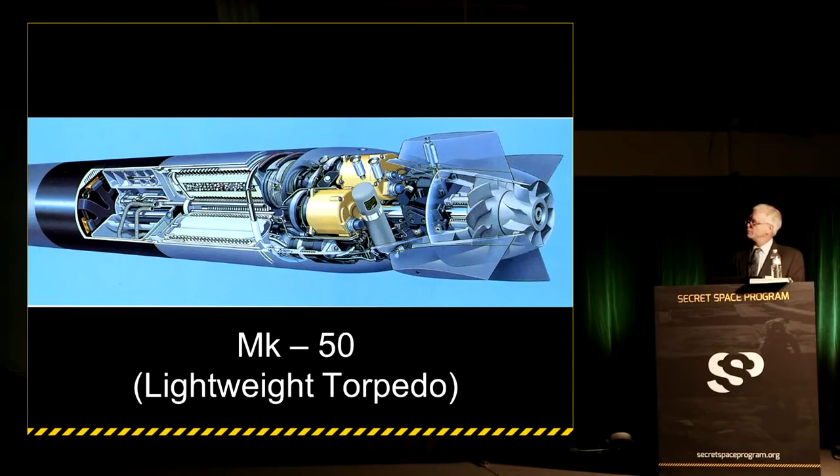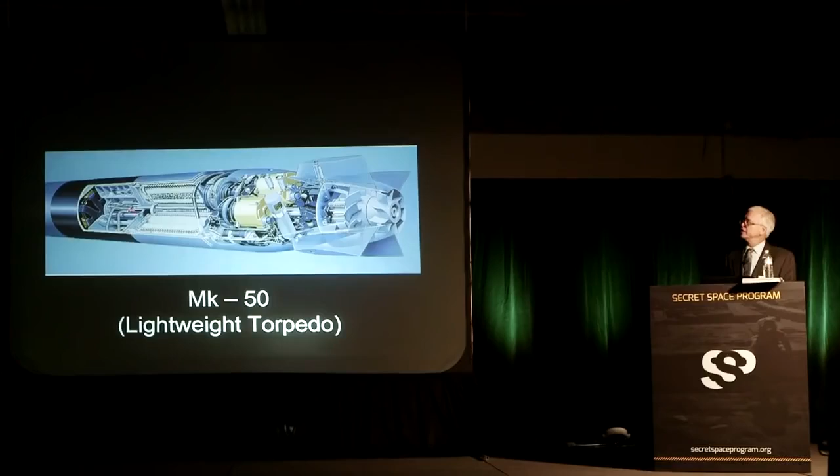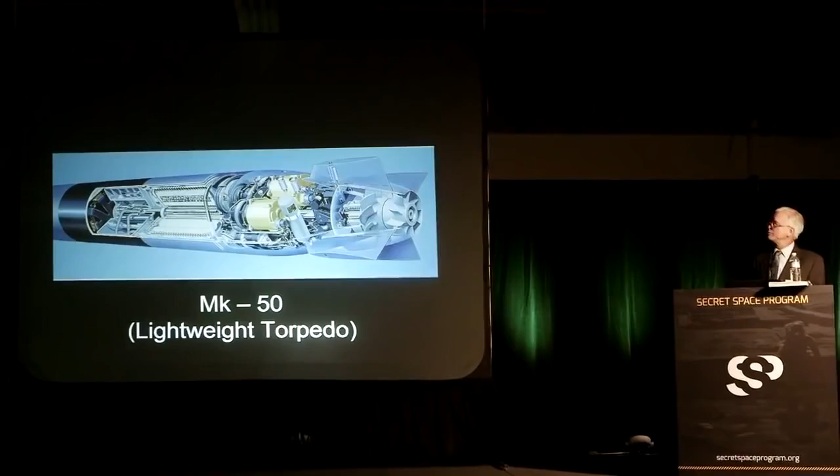This is a cutaway illustration of a propulsion system for a lightweight torpedo that basically involves a lithium core that is ignited once it drops into the water. This heats up an oxidizer, flows through here, creates high temperature steam through these heat exchanging tubes, goes through a transmission, drives a generator, and also a couple of counter-rotating props in the back.

Being able to figure all that stuff out, and I take a lot of pride in the accuracy of my work, involved a certain amount of engineering. Even though I'm not an engineer and don't have an engineering degree, I spent an awful lot of time studying how things are put together, how they work, and what the physics and engineering are behind these systems.

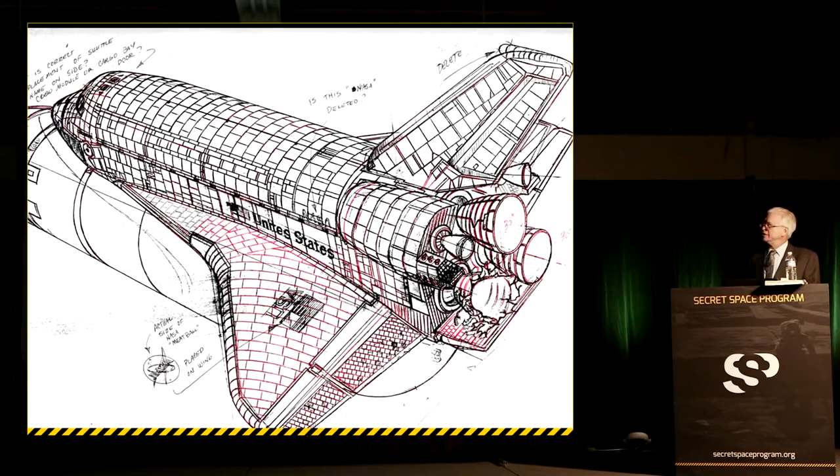Whether it's mapping out every single tile on the space shuttle or doing the cover of a magazine on the TR-3 - this particular magazine plays a significant role in the story I'm about to tell you - or mapping out the plumbing for an advanced rocket system, or the cover of another magazine.

Eventually, while working in the industry, I had the opportunity to make contact with a lot of people in the military, some of whom expressed an interest in having some of my artwork in their squadron ready rooms. So I was actually able to arrange to get what are called media orientation rides, going up in these planes to see how the pilots handle the stress of flying.

This particular aircraft, the F-16, is capable of over 9 Gs in a turn. So this brings to mind the question: why would you want an aircraft with that kind of capability?

I asked myself years and years ago, millennia ago, if man had never taken the time to study flying insects or birds or bats or any kind of flying animal on this planet, would they ever have had the inspiration to think of flying, to come up with the idea? I wonder whether we ever would have gotten off the ground if we hadn't had those other naturally occurring creatures to give us inspiration.

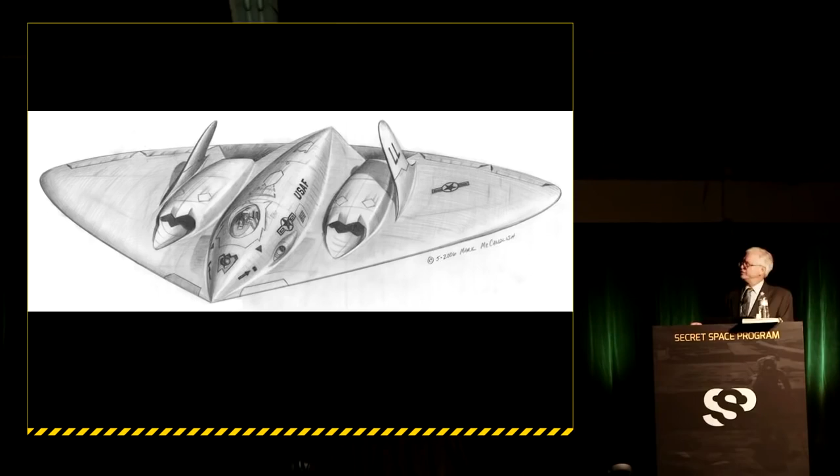There are ways that you can modify the inlets for the engines so that when a radar beam from a distance is looking at the sky where the aircraft is, it's harder for that radar to get into the inlet where those metal turbine blades are turning and reflect a lot of energy back and let people watching know that you're there. And so applying these different techniques, looking for ways that you can make an aircraft perform better and do it very quietly, very stealthily, even in the materials that are used.

I'm sorry, I pushed the wrong button here.

There have been a number of questions about what the name of this vehicle was, but for me, the discovery of its reality was kind of what led me down the road to being aware, or suspicious anyway, that there was a kind of secret space program.

And so the way this happened, I was approached by Lockheed Martin. I think at the time they were still referred to as only Lockheed. And the particular division that approached me was working on behalf of the Skunk Works division. And they said that we have a new aircraft that we want to build, and we need to get the appropriate funds from the government.

So we need you to create an illustration for us that shows an aircraft that's really fast, something that looks dynamic, very, very fast. And at the time, I was reading some of the trade journals like Aviation Week and Space Technology, and I knew that one of the up-and-coming technologies they were talking about was something called scramjet technology, which is shorthand for supersonic combustion ramjet.

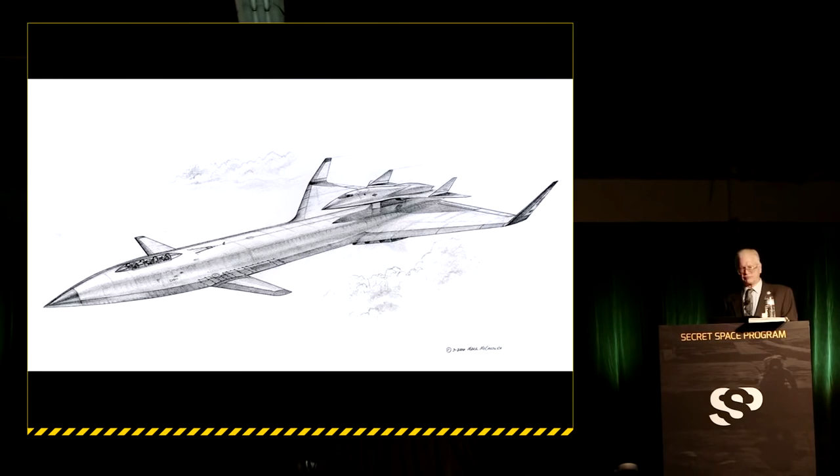It turns out that shortly after I submitted a sketch of this particular aircraft, they decided to completely scrap that. And so I wound up doing an illustration of an aircraft something like this.

There was one proposal where it might actually be possible to deploy this particular aircraft right out of the back end of a flying C-5A Galaxy. This is sort of my conceptualizing of how many you could actually fit into a C-5, knowing what the size of this aircraft was.

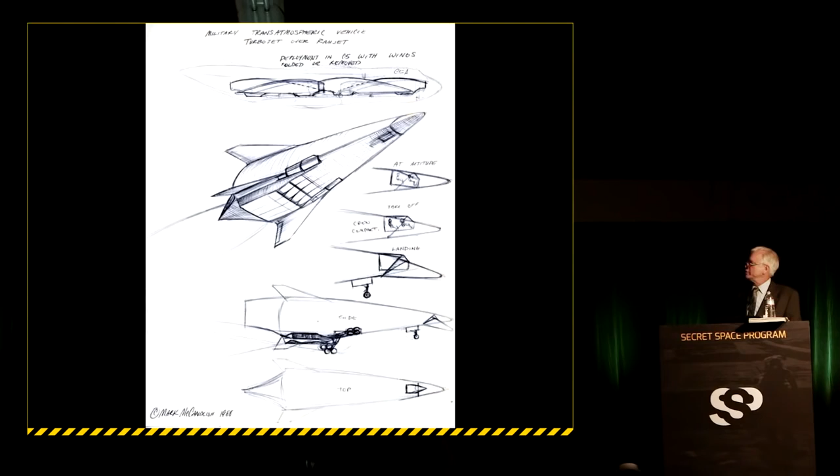It had a scramjet nacelle on the ventral surface, and it also had one on top. This particular version only had one underneath. And because of the shape of the aircraft, it made it very peculiar, or awkward, where the landing gear would come out in order for this thing to work properly.

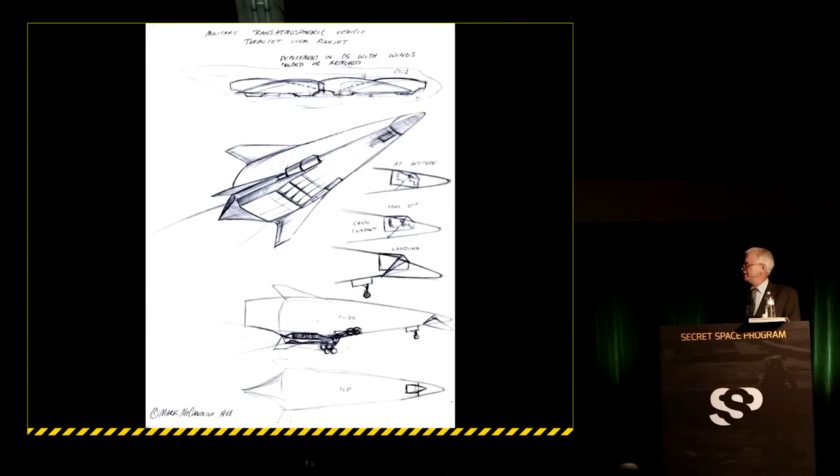Now, about the same time, there was a lot of talk about a crash, an aircraft vehicle crash that had occurred somewhere near Barstow, California. There were some people describing different features of the aircraft. There was a fellow that I met and talked with who was friends with a number of the astronauts, and they were describing how there was a particular astronaut flying a Learjet, ferrying it from one location to another through the state of Nevada.

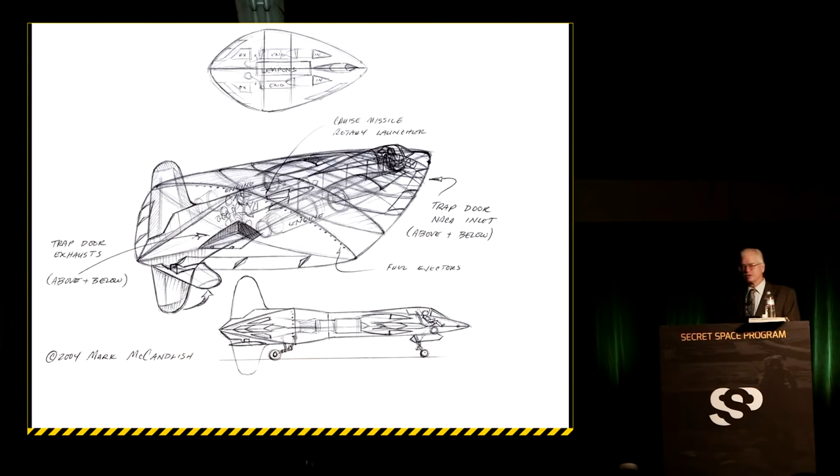He came out of the clouds and found himself sitting slightly above and behind an aircraft that looked just like this. Now, the interesting thing about this aircraft is that it had some very strange features. It had engines buried inside the fuselage with sort of a NACA duct-shaped inlet there. There was kind of a slot in the back. It looked like there was maybe a trap door, control surfaces along the bottom, exhaust diffusion.

But it also had this very interesting feature, and most people don't know this, that the predecessor of the SR-71 Blackbird, the YF-12A, which was kind of a strategic aircraft used for missile delivery, also had a folding ventral vertical stabilizer, or tail. And so this aircraft obviously had that same particular feature.

The vehicle was all black, or sort of a deep gray. As the pilot was flying along, looking at this thing through the clouds, he suddenly realized that if he had not seen this directly, he might have collided with it as they were flying through the clouds together. So he gets on the radio to his ground control people.

He says, I've got some traffic up here, why didn't you warn me? And they said, well, there isn't any traffic up there. And he says, well, of course there is, I'm looking right at it. It's black, shaped like a flattened out football, no wings to speak of, two tails, one above, one below. There was a slight pause in the transmission back and forth, and suddenly the pilot turns around, looks out the window, and registers an expression of surprise and anger, banks into the clouds and disappears.

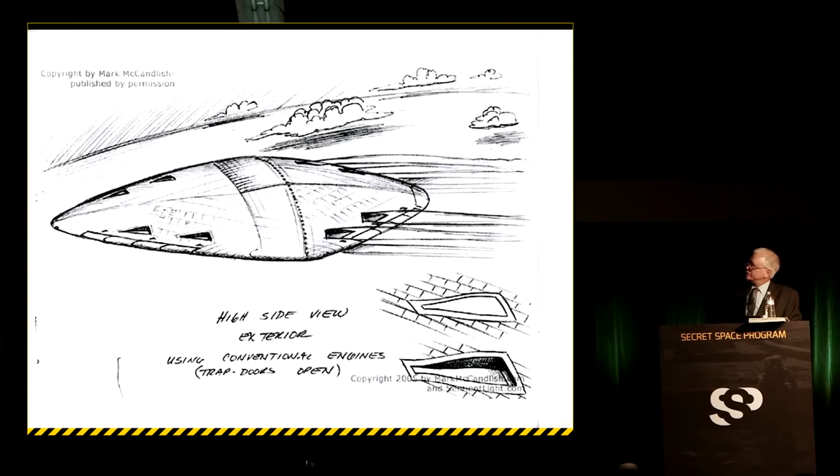This aircraft was being described within the industry as a vehicle that would produce an exhaust trail, the so-called 'donuts on a rope' exhaust trail. It seemed to imply there were two different propulsion systems in use in the aircraft to get it up to speed. Nobody really understood what they were or what actually made the aircraft function the way it did.

As it happened, I was asked to do this painting for Popular Science on the so-called Mach 5 spy plane, and it went into details about all the seismic events in Southern California that raised the curiosity of some people watching what was going on.

I remember at the time, this was in the late 1980s, early 1990s, that you could go out into the high desert of Southern California at night and see these things flying overhead, back and forth. When the sun was just below the horizon, it was dark out, but there was something still up there. You could see it moving, and moving very quickly.

About the time I did that illustration for the magazine, I was contacted by a colleague, a friend I went to college with, and I invited him to go to an air show at Norton Air Force Base in San Bernardino, California, about 75 miles east of Los Angeles. The Thunderbirds were going to fly, and it was a bit of an overcast day, but in the end I wasn't able to attend, mostly because I had a job to complete another illustration for a client over the weekend.

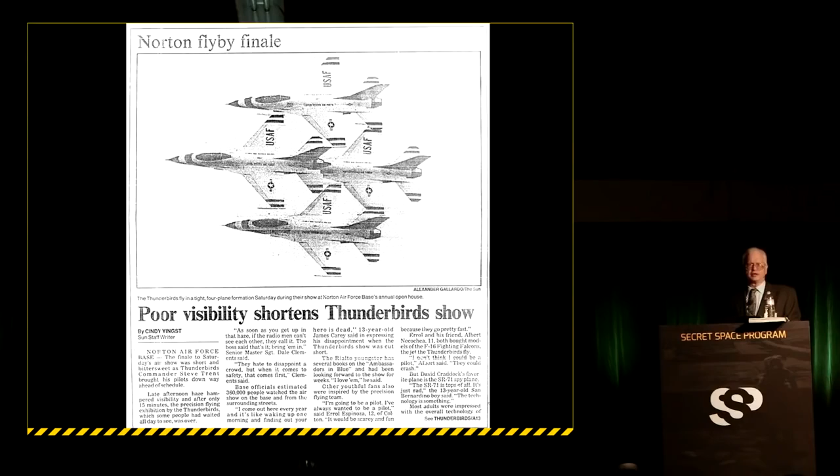It turns out, over the next few years, I began to get the details of what had happened. Right about the time the Thunderbirds flying demonstration team was beginning their exhibit, the gentleman my friend was with said, 'Let's go over here.' So they went into a hangar, and there was a group of other people there, including some well-known congressmen. Senator Alan Cranston was allegedly there, and Congressman George E. Brown, chairman of the Congressional Committee on Space Science and Advanced Technology, was there, along with a lot of high-ranking military brass. They all boarded a military passenger jet, a 727, and were flown up to Palmdale, to Air Force Plant 42, where you find Lockheed Skunk Works located.

As they were going into the hangar, the gentleman turned to my friend and said he just realized there are some aircraft on exhibit here that you're not cleared for, security-wise. You are not cleared to see these aircraft. So just enjoy the show, walk around, listen, take a look, but don't say anything to anybody.

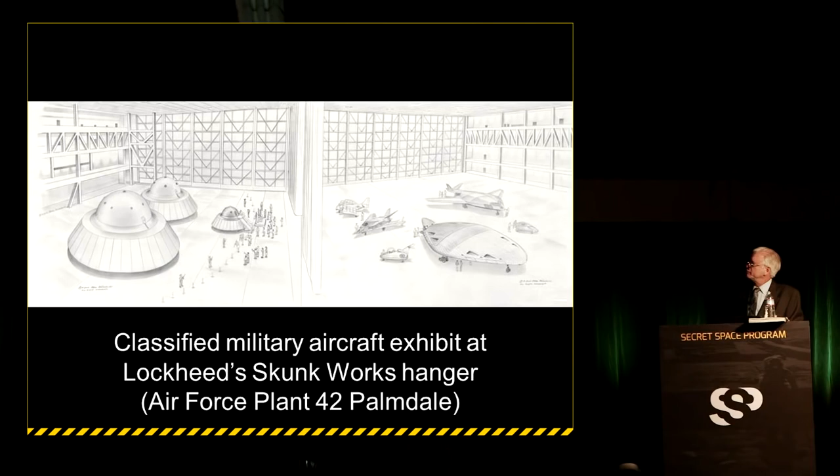This particular vehicle here, a rough close-up, was a sort of an answer to or a follow-up to the A-10 Warthog, which was an anti-armor aircraft. It's a vehicle that carries a very big Gatling gun, fires thousands of rounds per minute, and is very durable, very hard to take out of the sky. It's heavily armored, with a big gun that sits inside of it.

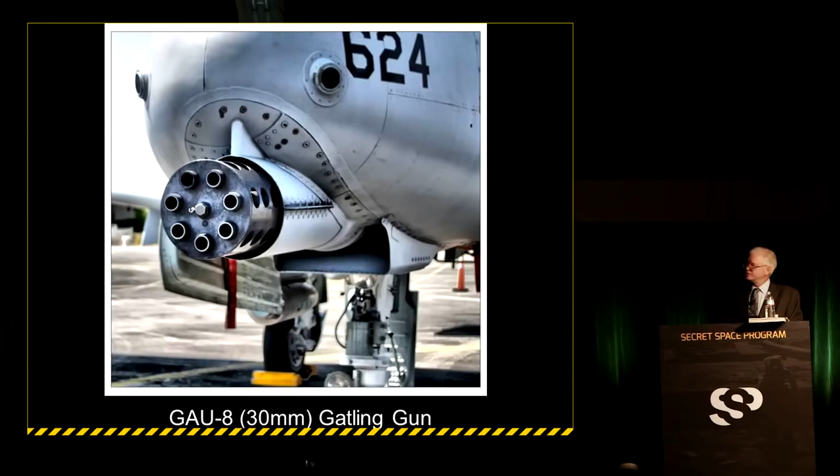This aircraft was designed with a very unusual kind of wing. In aerodynamics, they have something called the Coanda effect, which involves blowing air across the surface of a wing to provide lift, rather than just relying on the movement of the wing through the air to provide that same lift.

The design of this aircraft involved mounting the engines above and slightly ahead of the wing, using high-temperature alloy shaped like a flattened funnel that blows right over the wing. When the wings are all rotated in sequence, it forms a smooth ramp that the air can flow down, going from horizontal, following the surface of the wing with this Coanda effect, a kind of aerodynamic adhesion. This redirects the thrust of the engine to point almost straight down, right about where the center of gravity is for the aircraft.

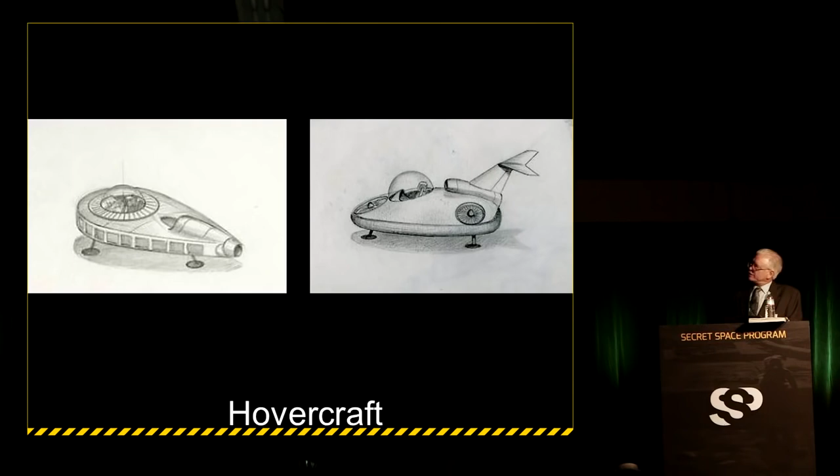The hovercraft were kind of unusual. There was one that had a jet engine in the tail, a teardrop shape, with a series of little trapdoors around the perimeter that would open and close as it was flying along. This jet engine also had a transmission connected to a set of counter-rotating turbine blades that surrounded what amounted to a bubble-type cockpit, almost like something George Jetson would be flying in one of his cartoons.

This one over here, I've actually seen a version very similar to this in one of the popular science magazines, where it had a turbine in the front and two in the back, one on either side, driven by this particular engine through a transmission of sorts. It had the same sort of sphere-shaped cockpit too.

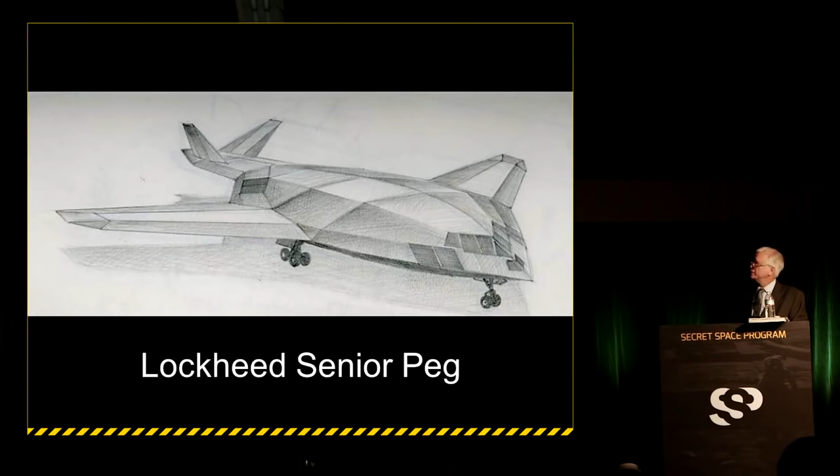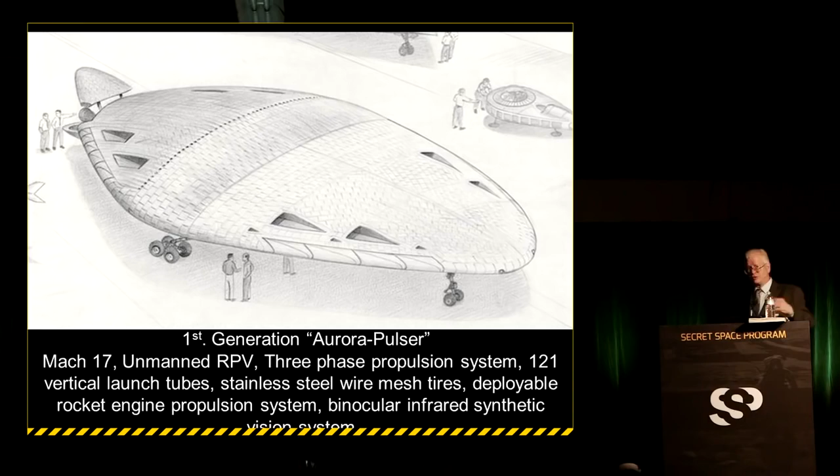Just like the aircraft I showed you earlier that had the tail above and below the fuselage, this aircraft had NACA duct-style inlets for 4 engines and 4 exhausts, both on the top and on the ventral surface, or the belly of the aircraft.

After I discussed this particular weapon system on Coast to Coast with one of the hosts working that particular program, I received some email from a number of sources indicating there were inlets and exhaust ports both on the top surface and on the ventral surface. At the time of the exhibit, my friend said he could only see the underside of the aircraft. He couldn't see the top because it sat up kind of high off the ground, so he didn't know whether there were 8 exhaust ports or only 4.

It turned out that one of the people I corresponded with after doing the radio program said they had been jogging late at night when an aircraft like this was leaving one of the United States Air Force bases in Great Britain. He said what was unusual is that when it took off and lit up the afterburners, which dumps a lot of extra fuel into the exhaust stream, you see this sort of bluish glow coming out of the exhaust. He said there were 8 ports, which helps point out that you have 4 above and 4 below. So we knew that was true.

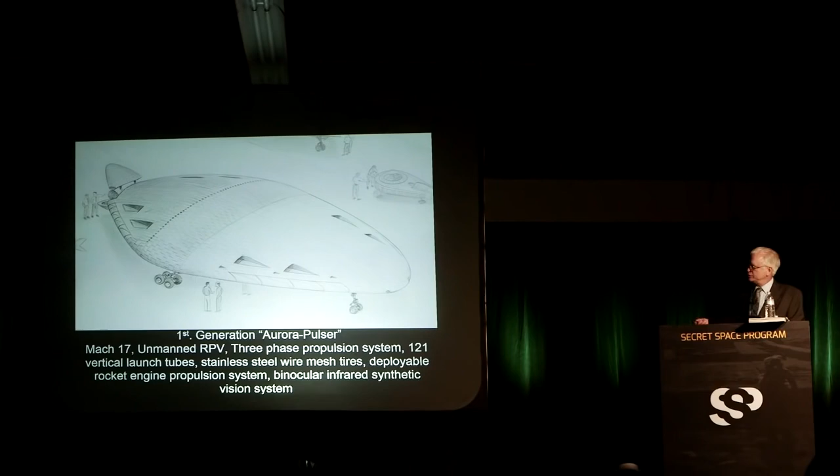Now, one of the things you don't see in this particular illustration, but is a little more evident in this illustration I did for Aviation Week - the perspective on the underside is a little off, these should be flattened out more - is that there's 121 vertical launch tubes in the belly of this vehicle. Each one is capable of carrying something like a cone-shaped reentry vehicle, like a MIRV, which also suggests deployment from outer space.

The way the system would work was remarkably simple. It had a kind of tile with explosive bolts holding it in place on the outer skin, and sitting behind it, the weapon would be held in place. It's not shown in this illustration, but I've subsequently learned there was a kind of three-piece fiberglass sabot which would hold the weapon straight in the bore, so it would always be pointing a certain direction.

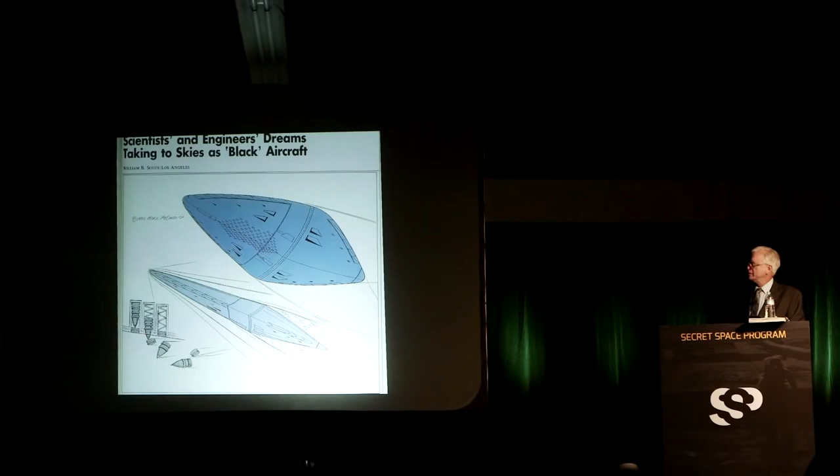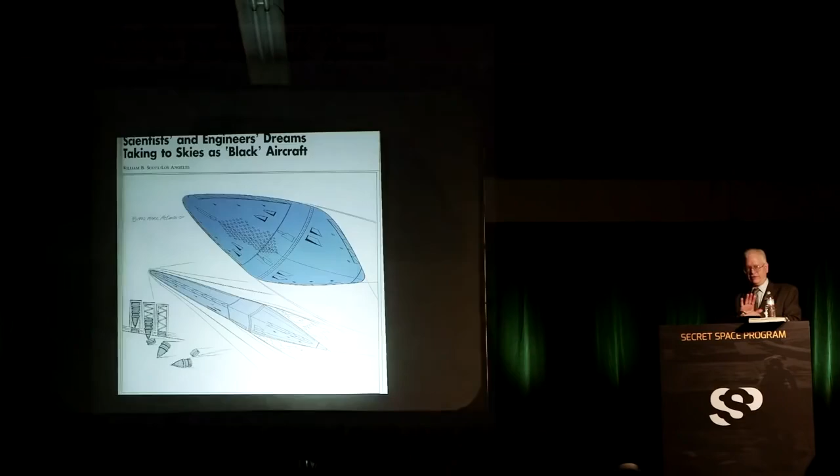The ingenious and simple aspect of this thing was that when the explosive bolts on the outside were ignited, the tile would disintegrate and blow away. And when it did, there was a big coiled spring about 12 inches in diameter behind the vehicle that would push it out of the hole. Right behind the reentry vehicle was another tile that would slam down into place and cover up that hole again, almost in a tenth of a second.

The reentry vehicle - oh geez, sorry, let's see, where are we - right there, would then stabilize, because of its center of gravity weights and the shape of it, would stabilize in the airstream, go into the atmosphere, and be able to acquire its target and do its job.

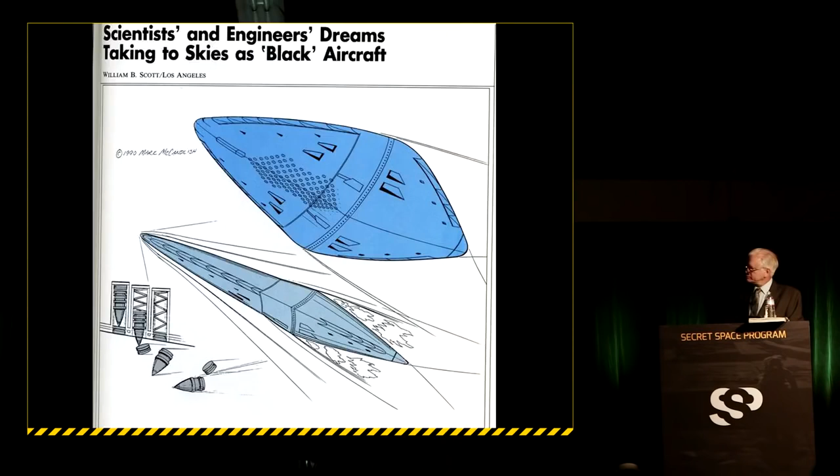One of the things this particular aircraft would do, if you look at the ridge here where these fuel ejectors were located, is expel fuel that would be ignited by just the intense pressure and heat of the air flowing across the front of the aircraft.

One of the things the artist did not capture in this particular view was the fact that the front end of this thing is going through the air so fast that it's glowing red hot, just because of the velocity and friction going through the air at such a high speed.

As that air is further compressed as it comes up on this ridge, it meets with the fuel. As the fuel is sprayed into the airstream, it spontaneously combusts. But by this time, the aircraft is already going well above Mach 1, so there's a supersonic shock wave that forms and basically separates...

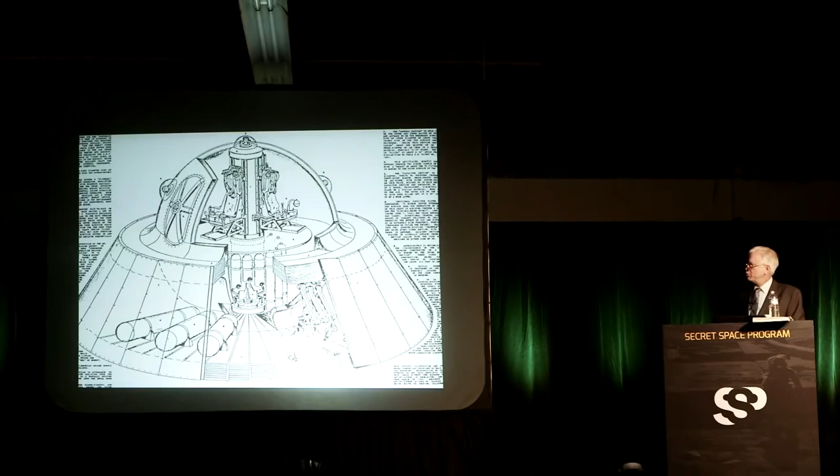If you think about it, there's a process used throughout the industry, and even in dentistry, called centrifugal casting. What you do is create the mold and whatever components you want to go in it. There's a sprue in the middle, and you take the molten material you want to go into the mold and pour it through a funnel-shaped opening. If the mold is spinning, the molten material flows out to the outer edges and pushes away all the little air bubbles that might get trapped, and they migrate back to the center where they can be drawn out.

So you wind up with a single casting, if you will, with all of these components in it that will not have any air bubbles, inclusions, or impurities—anything that would cause the system to short out when you're using millions and millions of volts of electricity.

But even so, when I computed the total weight of all that metal and quartz, at 24 feet in diameter and 12 to 14 inches thick, it worked out to something like 24,000 pounds. So you have to ask yourself, how can something that weighs 24,000 pounds get off the ground—especially since nobody believes something using the Biefeld-Brown effect could actually levitate something that heavy?

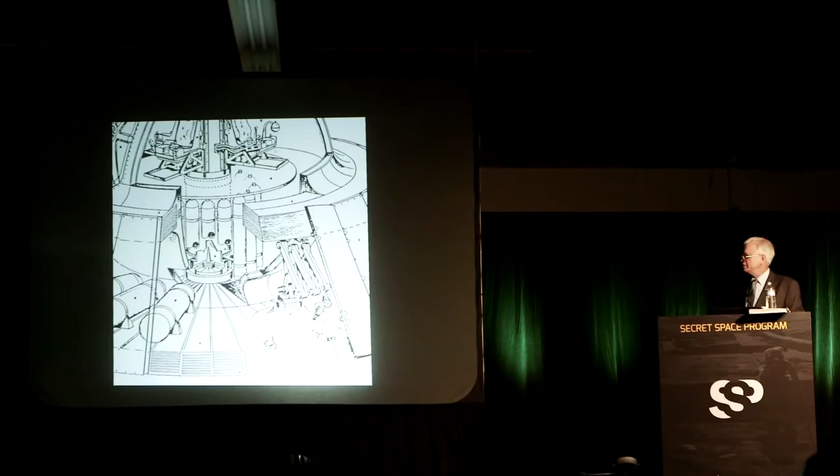The plates in each stack were staggered so that the gaps on one lined up with the plates on the other. There's significance there, because if you map this out on paper, you see that if you had something like a 1/16 of an inch thick, you could slide it into the gap. If you shined a laser beam, like this thing I'm carrying in my hand, through this material, it would be able to filter through all the gaps because of the way the plates are aligned.

So I began to look at other phenomena. It also occurred to me that what's really strange about the coils is that normally, if you're talking about an electrical circuit using millions of volts, you want wire with many strands twisted together so it can conduct more current.

If you know anything about physics, electrons are all negatively charged, and you can't really bring them together, except in superconductors, because like charges repel. So when you have a conductor and electrons are jumping from one atom to the next as the electrical pulse flows through, the electrons repel one another and migrate out to the surface of the conductor.

So in this instance, you have coils of single filament copper wire, or at least what appears to be single filament copper wire, running through this quartz-like material without multiple strands to conduct more electricity. It just seems like a contradiction.

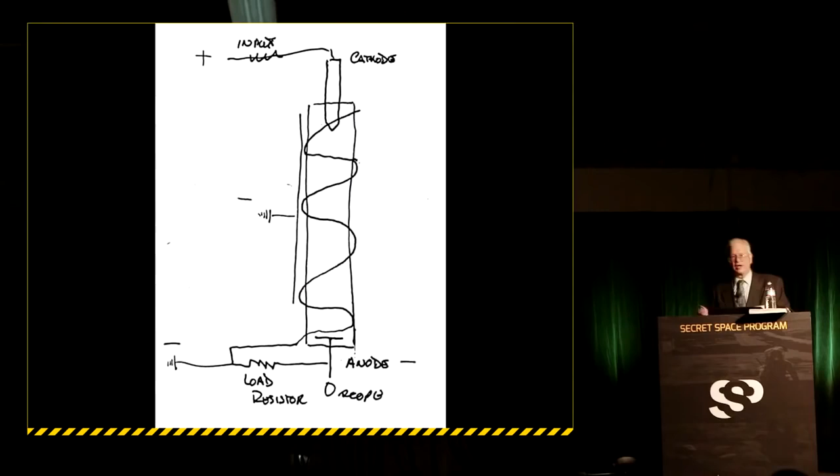This was patented by a gentleman named Kenneth Shoulders. He was a fellow who worked with another friend of mine, Hal Puthoff, for a number of years. And he had done a lot of research into something called zero-point energy.

Zero-point energy is a technical term in the physics literature - quantum zero-point fluctuations of the vacuum. Now, the discovery of zero-point energy was made probably back around the end of the 1800s, early 1900s. They were beginning to experiment with cryogenic fluids, taking a gas like nitrogen or oxygen and compressing it down to the point where it actually became a liquid, became super cold, hundreds of degrees below zero. And the research they were doing was trying to find out what the actual temperature was of absolute zero. And by absolute zero, I mean that there's no warmth left in the material - no Brownian motion, no movement where the individual atoms or molecules are vibrating, bouncing around.

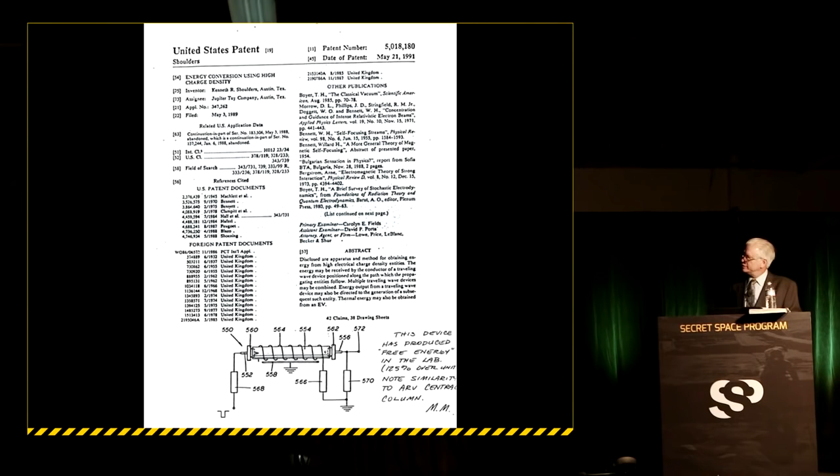So I started looking at what zero-point energy is, where it comes from, how it can be manipulated. And I looked at some of the papers that were written by scientists like Bernard Haisch, Alfonso Rueda, Hal Puthoff, Daniel Cole. In the early 1990s, they wrote a number of papers that actually described this, and you can see the similarity between the two things - you can see that there's clearly a design similarity. And yet, I looked for other possibilities as well.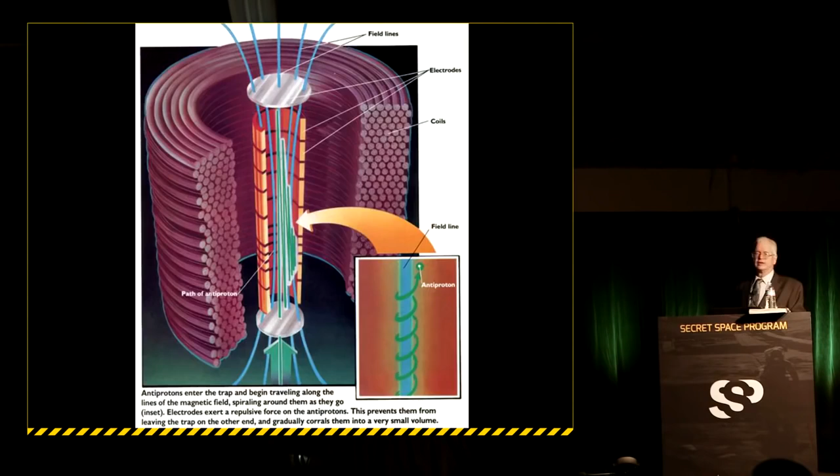The possibility that we had something like an antiproton trap going on here, where there might be some aspect - you have the same kind of coils going around the outside, a central column, a way of trapping antimatter. I thought that this might be something like the so-called antimatter drive that was used in some of the Star Trek vehicles. So I began conceptualizing, began looking at different ways that you could actually make this system work.

Now, somewhere along - I think it was somewhere in the late 1990s, early 2000s - I came across a number of books that described: Joseph P. Farrell, who's another one of the speakers here, had found some historical records after the Second World War that described a device that was being worked on by the Nazis in the Wenceslaus mine up in southern Poland, called the Nazi Bell Project, or Die Glocke.

Now, that particular system, based on the documents that were found, was made up of a pair of counter-rotating cylinders, one inside the other, with a coil that went around the outside. And electricity was being fired through the system. So I started looking at ways that you can make that work.

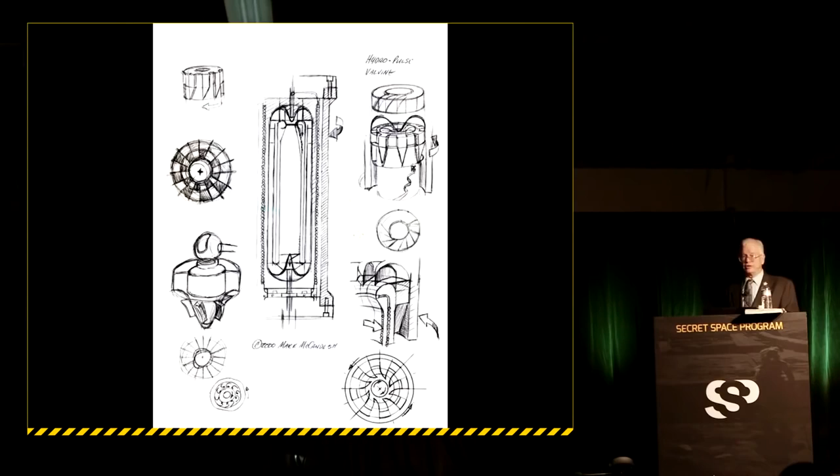Now, the first thing I thought of was that if you put a lot of electricity in this thing and you have big coils around it, you actually may wind up in a situation where you can't get an electrical motor to actually drive the system, unless you had a pulley system that was sitting way off to the side, away from the electromagnetic fields that would sort of interfere with its operation.

But I found out that, of course, Mercury has some interesting characteristics - I think there's something referred to as the nuclear spin ratio. The particles in the nucleus of the atom of Mercury and the electron shells have a spin ratio of something like 60 to 2. And bismuth, by the way, also has the same kind of property. So I thought it was interesting that these two materials had these unusual characteristics that might make them very important in the operation of this kind of thing.

What I found was that it goes all the way back to Michael Faraday, and the first electrical motor was really just a puddle of mercury with a permanent magnet sitting in the middle of it in a petri dish. He had a little scaffold off to one side with a copper conductor, and he put one wire into the mercury, sent it over to the battery. Another wire would hang down from the top of this scaffold. The minute you connected the circuit, the mercury would begin circulating around inside the petri dish, around this magnetic field.

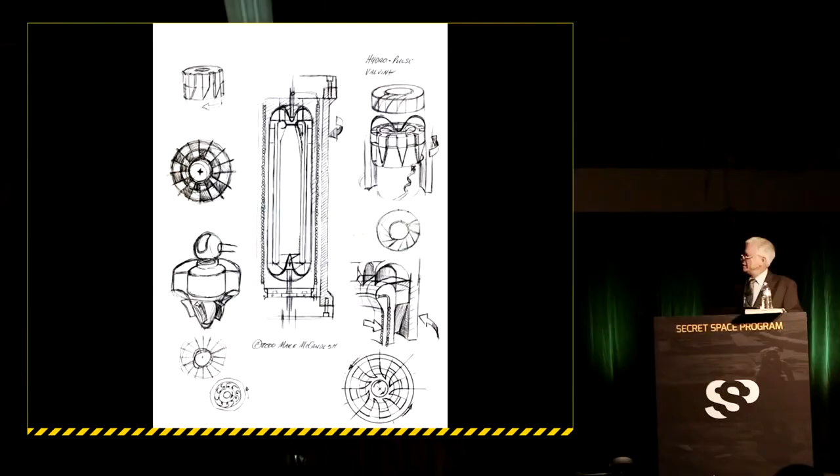If you look at the way the field lines are set up in this particular vehicle, you can see that the field lines basically go out around the outside and stroke down through the middle. That's what they do. By setting the system up this way, you already have the built-in mechanism to make this thing rotate on the inside, just like Michael Faraday's little motor from back in the 1820s, I think it was.

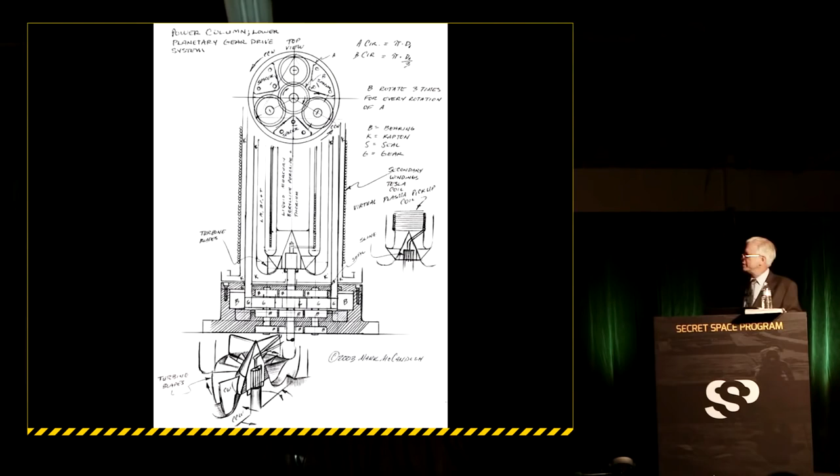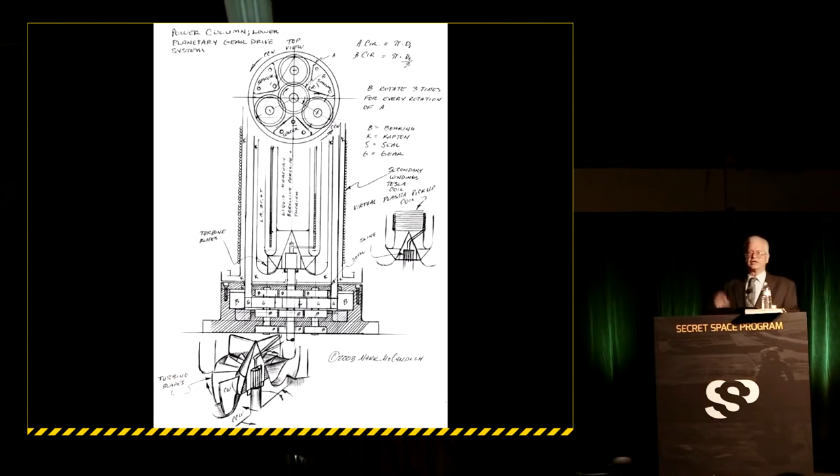The other thing I realized was that you're going to have some way of circulating the mercury. In one of the instances I was looking at ways to mechanically do this and get this counter-rotation going, as described in some papers from the Nazis' experiment, was creating a kind of planetary gear drive system that would sit either at the top or bottom, so that as one of the cylinders is turning one way, the gears would force the other cylinder to turn in the opposite direction. The benefit of this is that when you have things turning in opposite directions or sliding across one another, you get this vorticular motion in the mercury, and it seemed to me that this vorticular motion was something very significant, very important to the operation of the system.

And it's all leading up to the tapping of zero-point energy, which I'm going to get into shortly.

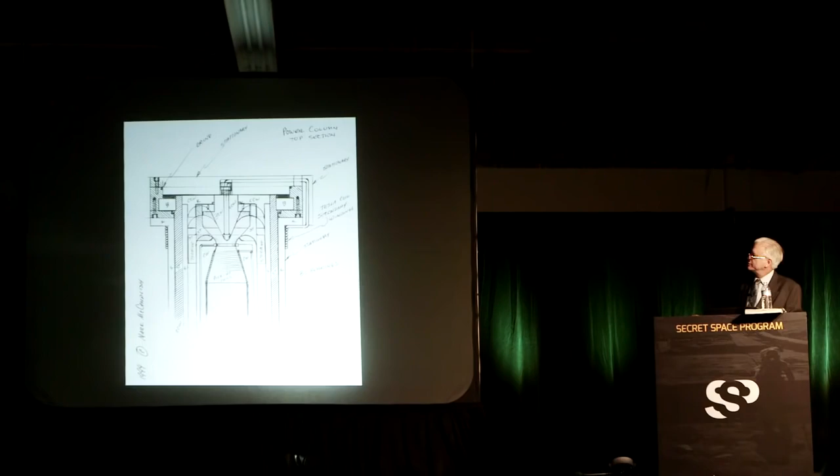The idea was that the mercury would come up in the gap between the two cylinders, reach the top, and be forced down through this venturi, this little funnel-shaped opening at the bottom. You'd have your cathode up here at the top, and a ring embedded in the quartz of the interior cylinder - this is the other cylinder on the inside. You'd have coils inside, so that as the mercury was being charged with electricity, it would cause the mercury to circulate. Because the cylinders are turning in opposite directions, you get this natural tornado-like vortex formation in the movement of the mercury through the system.

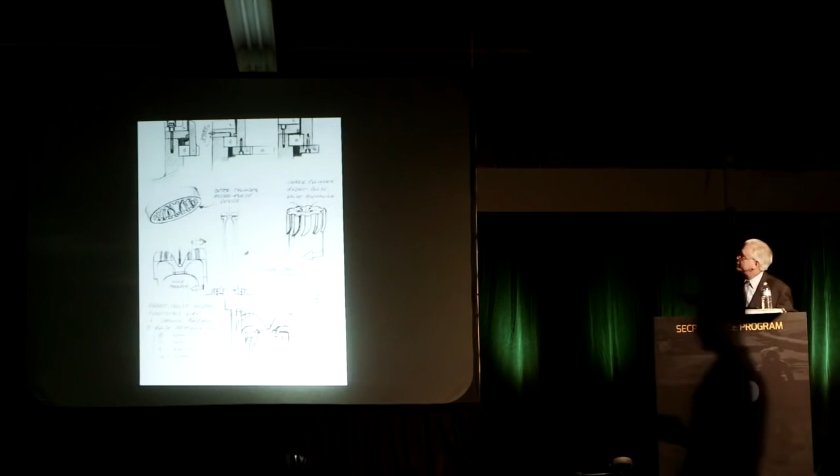The next thing I did isn't as easy to see in this particular diagram. Maybe the next diagram has a little bit better way to see it, down here in the corner. You see the mercury comes up here, and goes down through this opening. Right below that second electrode, shaped like a ring, you get the electricity jumping from there to there as the mercury is being pumped through by the natural flow caused by the electricity going through it.

As a sudden discharge of electricity goes through the mercury, and the mercury is spinning the whole time - spinning like a tornado - you send the electricity through it, and it creates a phenomenon very similar to when a smoker blows a smoke ring. If you've ever studied a smoke ring, you can see it's caused by a sudden discharge of smoke from the lips of the smoker, and the surrounding still air slows down the outer edge of the smoke as it's being expelled, creating a self-stabilizing event where the smoke forms a perfect ring. Even dolphins can do this with the air blown out of their blowhole.

The other thing about that is you find that as this phenomenon is moving downward, probably approaching something near supersonic speeds, down through this central column.

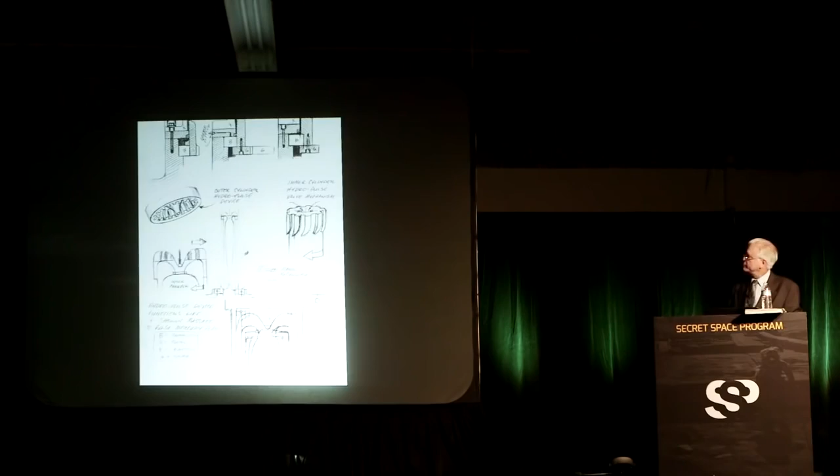There we go, down through the center, right there. Because of the rotation of the device, not only is it creating a kind of smoke ring of ions, highly charged ions blowing down through the center of this device, but you also have a precessing, a rotating around a horizontal axis and a vertical axis, so that you have this twisting motion that goes on.

And so what that actually winds up simulating is ball lightning, which is a naturally occurring phenomenon. It's noted for its ability to be self-sustaining. It creates its own electromagnetic field.

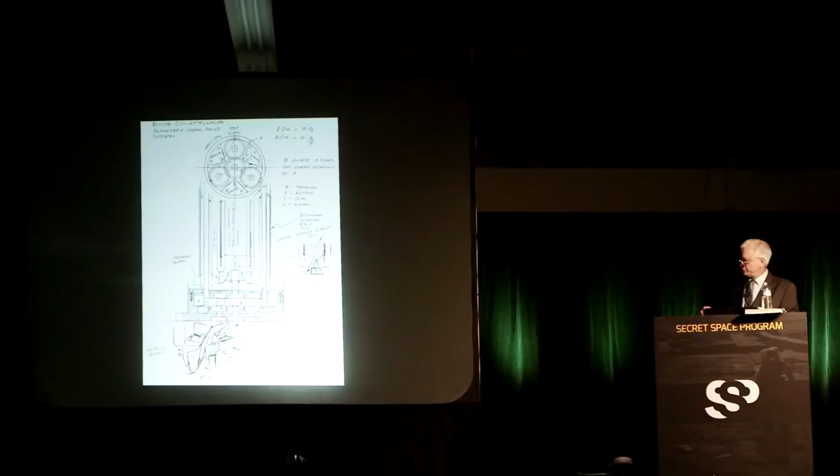So in the process, what I really think I've stumbled across is a way in which this system has three different electromagnetic fields. It has the one created by the primary windings of the Tesla coil. It has the windings in the center that also create their electromagnetic field. But then when that plasma ring, or I should say it's actually a sort of low temperature plasma-like phenomenon, or a virtual plasma, fires down through the center, it also creates its own set of electromagnetic field lines.

And so what happens is you have an effect very similar to the electromagnetic pulse that occurs when a nuclear bomb goes off. Well, they actually have a weapon, it's called the explosively pumped electromagnetic pulse weapon, and it does the same thing. What it does is combine overlapping electromagnetic field lines, and then using explosives, it pinches all those magnetic field lines, and it creates a powerful pulse.

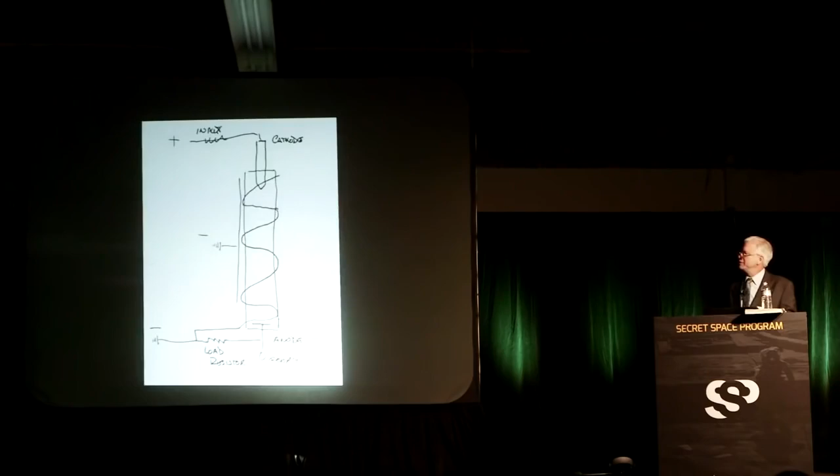And so what I'm suggesting to you is that process actually forms a kind of a doorway for tapping into this zero-point energy. Now why is that significant? Why does that mean anything? Well, part of the reason is that this device, when it taps into zero-point energy, they've shown that zero-point energy...

...is actually responsible for the effect of gravity, for inertia, and for mass. And so if you're pulling some of that energy out of the environment, it may be, even though there's an infinite amount, some of the latest figures are 10 to the 109th power joules per cubic centimeter. That's one of the latest figures I've seen. That's a monstrous amount of energy.

That's enough energy that if you took all of the energy in this amount of space-time and were able to tap it, it would be able to boil off the oceans of the entire planet. So you can see how this technology makes a hydrogen bomb look like a firecracker. That's probably one of the reasons why there's such a tremendous effort to suppress it, because in the wrong hands it could be weaponized and be very dangerous. But if used in peaceful ways, it provides you a tremendous amount of power.

And that power, when pulling this energy out of the environment, it's my belief that there is a moment in time where it doesn't allow that zero-point energy to interact with the atomic structure of the vehicle. Now this interaction is what is referred to as the creation of mass.

For example, Einstein said you can never travel faster than the speed of light, because as you accelerate through space-time, your interaction with the zero-point energy embedded in space-time raises your mass. So it makes it harder and harder for you to go faster, so you can never really reach the speed of light. In fact, he said if you could, as you approach the speed of light, your mass would become near infinite.

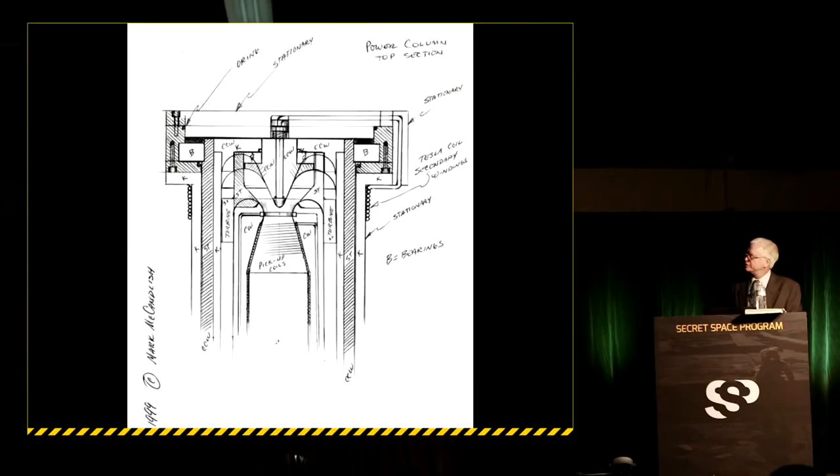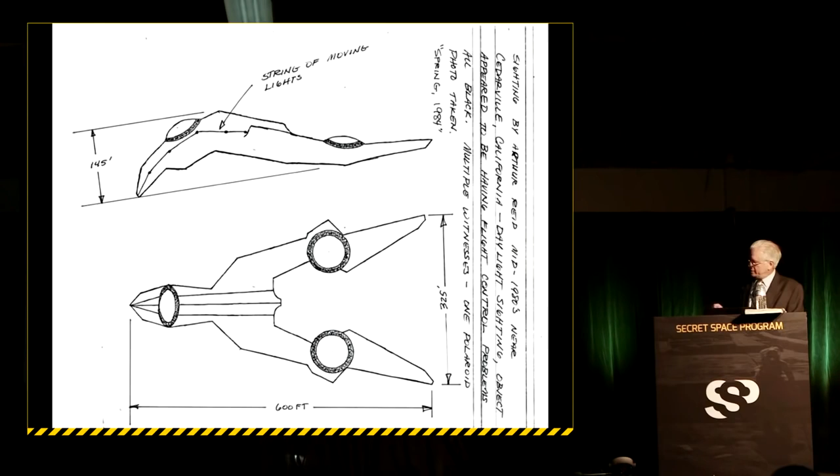This was a drawing done by the eyewitness, the fellow who took the photograph. There were some things about it I could go into, but the important thing to remember is that some of the features look remarkably like some of the structure on the so-called alien reproduction vehicle. It did seem apparent to him that these wingtips could actually rotate inward so that this thing would become more of a triangular shape, which would also help with issues like storage.

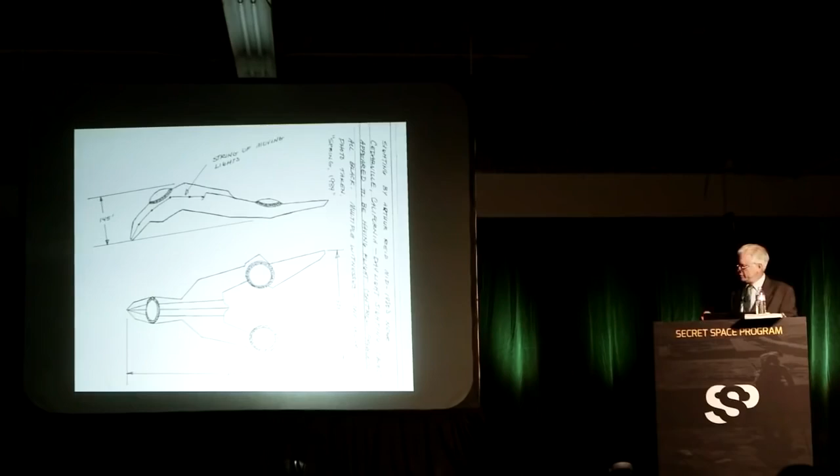Now, this is a little bit more detailed drawing that I did based on what I could see through the loupe. It actually looks like there may be some ways in which this area and this area here can be articulated so the thing can fold itself up for storage or for putting into a hangar.

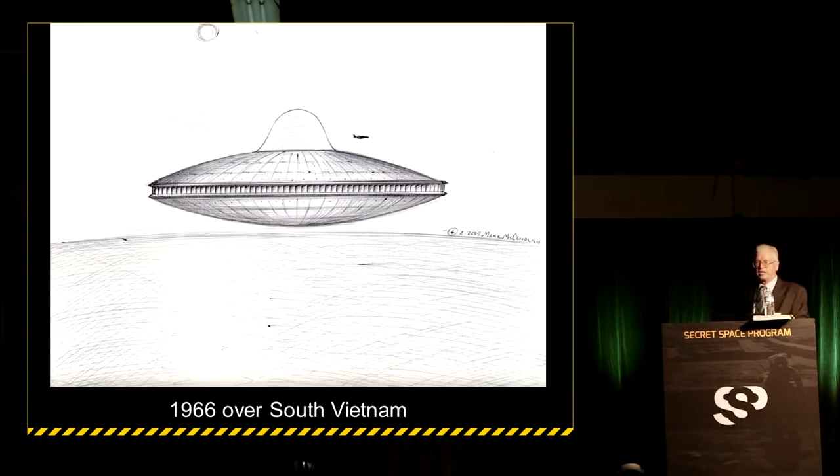Now, there's a lot of other incidents, eyewitness testimony, pilots that I've spoken to. This particular image refers to a sighting that occurred back in the mid-60s on the way back to Vietnam. That aircraft right there is a B-52, which is a huge aircraft. They said that this vehicle had a translucent illuminated dome that they counted 27 stories in, and that was kind of how they helped to gauge the size of the thing.

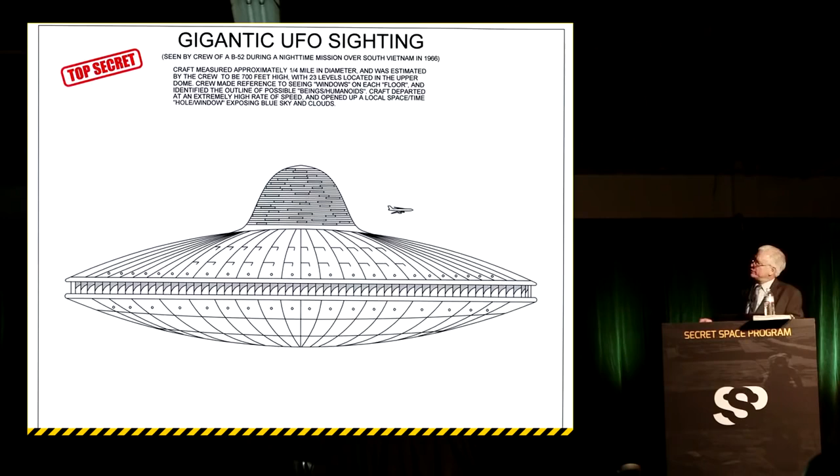But he said that each one of the turbine blades, these rotating turbine blades around the perimeter, each one was the size of a bifold door on a huge hangar. One of the things significant about this encounter, this is based on eyewitness testimony, just a rough sketch here, but this was taking place at night over the ocean at 1 o'clock in the morning, no clouds, just the moon.

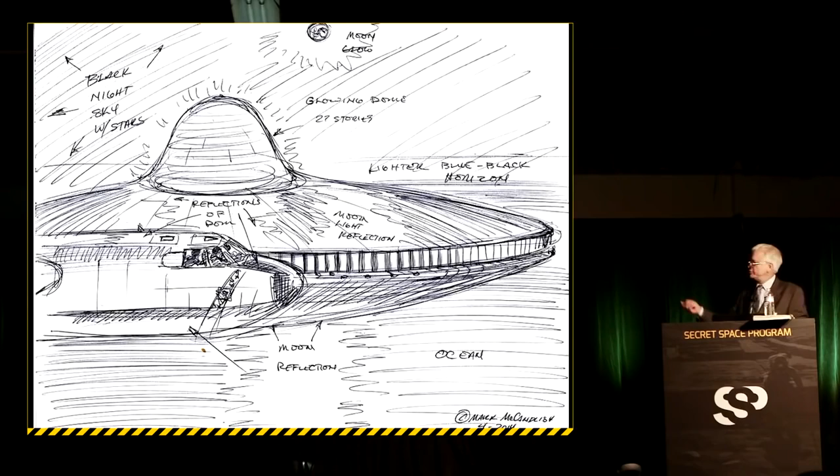And when this aircraft, this large disk, which they estimated to be a minimum of a quarter mile in diameter, when this thing departed, as it went out through the blackness in the sky, in its wake was this turbulent, shimmering image of what looked like a blue, daylit sky with clouds.

So what seemed apparent to the crew of this B-52 was that when this thing created a wormhole, there was actually kind of an image dragging that would go along with it, that it would either show you where it was going to or you'd see some of where it had come from. Now, I've personally witnessed that on at least two occasions. And very often you find that these types of events are very mystifying and hard to understand because you don't readily understand what it is you're looking at.

Now, like I say, I'm running out of time here. This is a crash recovery that occurred in May 1989 in East Germany by some of our special forces. It was a vehicle that was utilizing what appeared to be a lot of stealth technology.

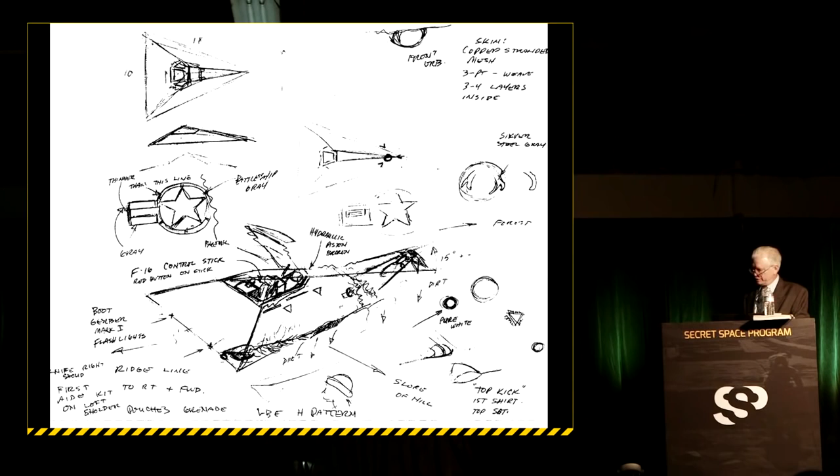The canopy on this thing had a lot of the same kind of details that you would see on the stealth fighter. You had the same sort of jagged edges, same sort of features that would help defeat radar reflection, things of that nature. This is a mechanical 3-view drawing that was done by my friend and colleague Michael Schratt, who I owe a lot to for helping me put this presentation together.

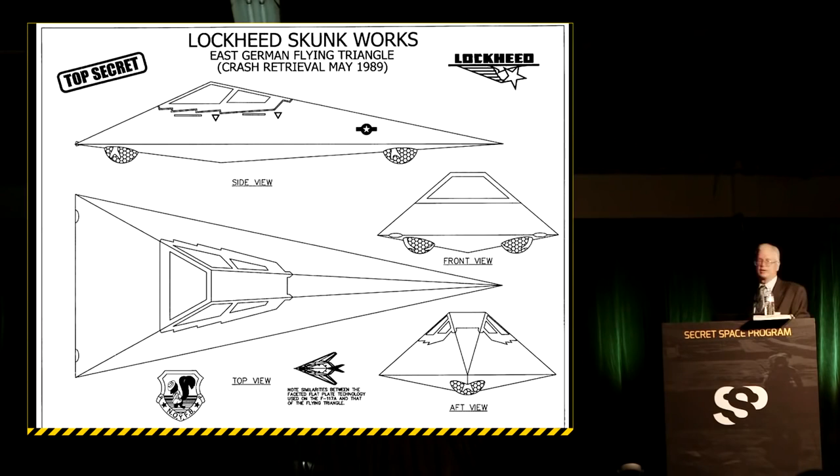But what was interesting about this particular vehicle was that it had these spheres that appeared to be made of a white ceramic material, like a superconducting ceramic, like yttrium barium copper oxide. When the vehicle crashed, the pilot hit a tree coming over a ridge line and then tried to pull the nose up. He hit tail first, and when he hit tail first, it broke the tail in half and released one of these spheres.

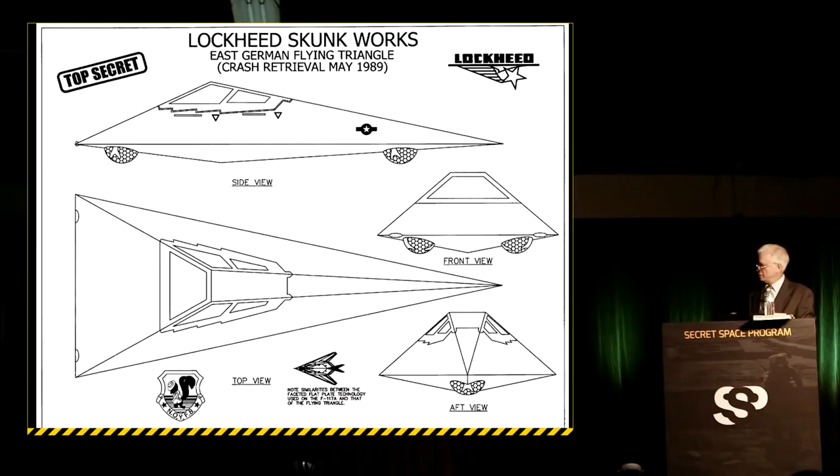And that sphere looked pretty much like this. It had a couple of wires coming out of the top. There was a little circular opening with a metallic thing in the middle. But it had this beautiful pumpkin shape with a scalloped appearance.

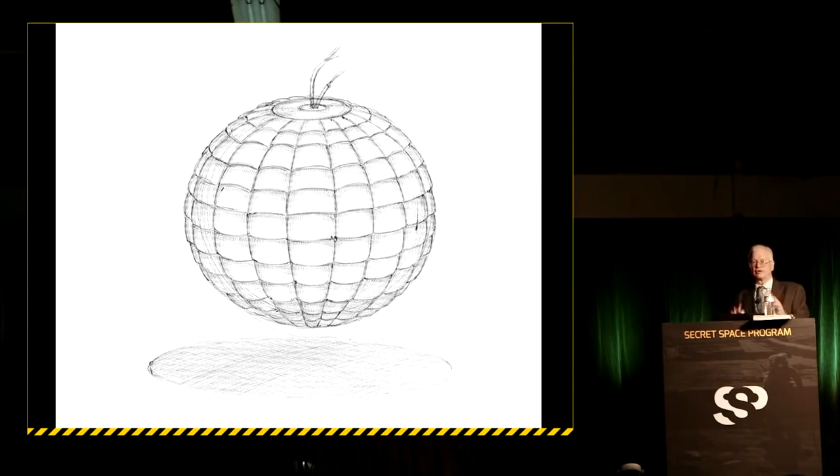He said that when the thing was bobbing around the field and they were trying to recover it, every once in a while it began to spin and wobble and get a little faster, then sparks would jump across the two exposed wires, and it would slow down and start to calm down again. They were given an aluminum utility case to try and capture this thing. They were told not to touch it with their bare hands.

So there are two reasons I can think of. One, either they're using cryogenic fluids and it's really cold, so they might get a burn, or they might get an electrical shock, which seemed pretty apparent. But the thing was floating above the ground.

One of the things we know about superconducting materials, thinking of this in the context of a propulsive system, is that if you've seen films of superconducting wafers floating above magnets, they have to be set, as it's referred to, in situ, in order to create that levitating effect. In other words, you have to chill that ceramic material down right at the spacing you want to establish between the magnets and the object itself, so it'll maintain that attitude. You can crank it to a certain attitude and it'll maintain that attitude, and you can move it around, but it'll always stay at that one reference angle.

So I started thinking that if this thing is filled with some kind of cryogenic fluid, and this is some kind of high-temperature superconducting or ceramic material on the outside, the scalloping may actually create a turbulence pattern on the inside that helps stir it up. One of the things we know about superconducting materials is that when they get anywhere near moving magnetic fields, they produce a lot of electricity. And that electricity, unlike normal conductors which cause energy to bleed off, superconductors tend to hold that charge for a while.

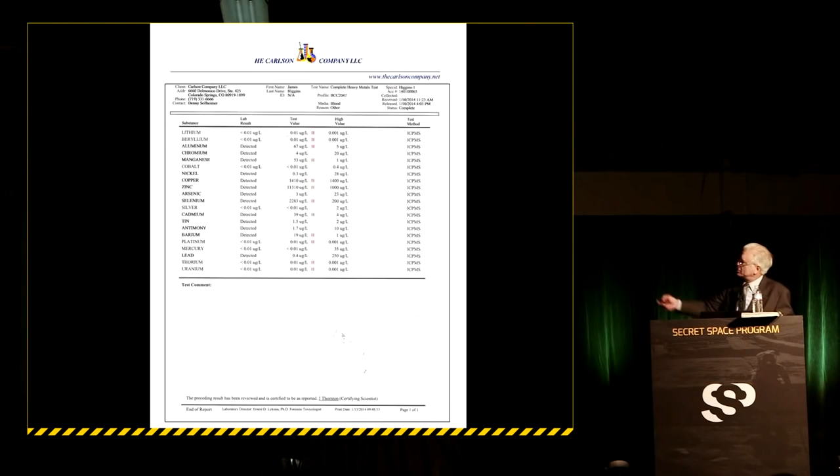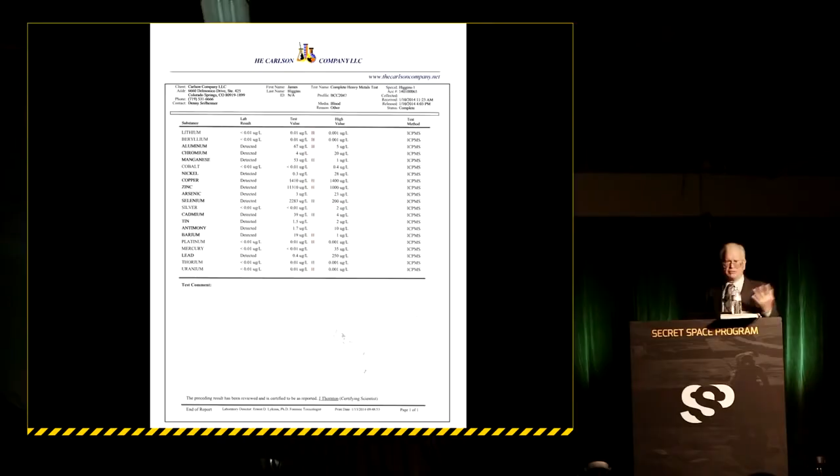What we found is really hard to see on this chart because it's so small, I wish I could blow it up somehow. But basically all of these little things here, marked with an H next to those levels, are all radioisotopes like uranium, thorium, beryllium, cadmium - things you would not find naturally occurring. So it seems apparent to us that he was poisoned using radioisotopes.

So I would like to dedicate this presentation to the memory of my friend James Higgins. He was a brilliant young man who had great potential as a filmmaker ahead of him, and I thank him for the time he dedicated to documenting what I did. I'd like to thank you for your time and attention. Thanks very much.